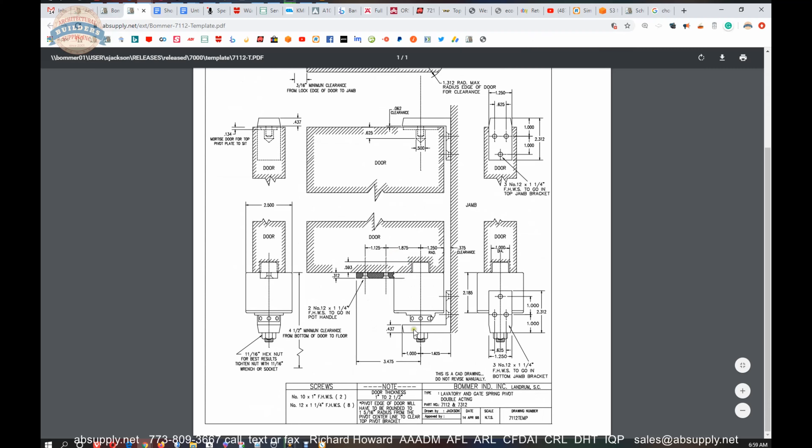Let's switch to the screen view where we can take a look at the supporting documentation for this item. So this is the item that we are looking at, the F7000 31A. Template, instructions, and product catalog. Let's take a look at these in order. Now, the template is going to refer to the entire device, the entire 7112 and a 7312. We'll take a look at what the difference is there. But here's what your installation is going to look like, right in this area.

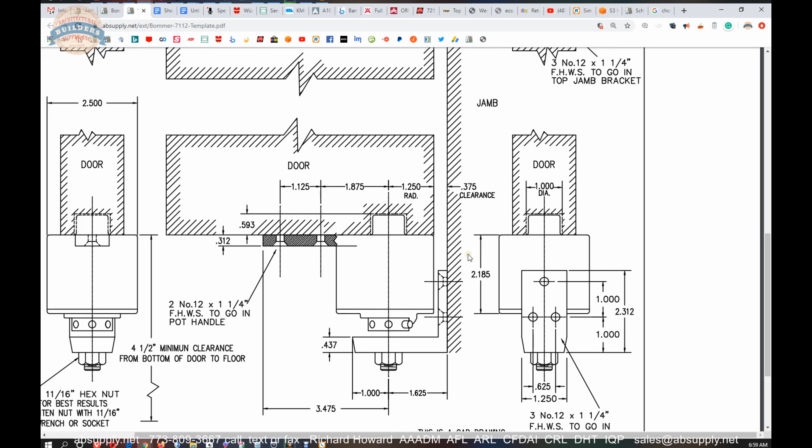So does the client need a top pivot only and they have an existing 7112? Yeah, certainly. We do sell the top pivots by themselves. There's a reason people are purchasing them. But this will show what that installation needs to look like. Okay, let's switch over to the instructions. And again, this will be instructions for the entire unit.

If you are using this in some way outside of what it was designed for, meaning the 7000 series double-acting pivot, what I would be most aware of is the jamb to the vertical axis of pivoting, that 1 5/8. So that dimension is fixed, what your jamb to the vertical axis of pivoting would be. If you're using this with something else, make sure that you'll be able to accomplish that plumb vertical axis of pivoting. These installation instructions apply to the entire unit. I won't go through them in this video.

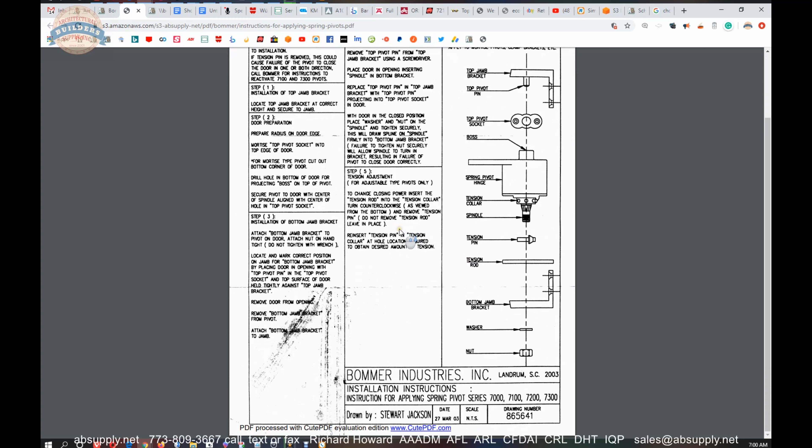Then let's switch over to the product catalog, and that's going to show you the 7000 series spring pivots. And we go right to the 7112 because that's what this has come out of. So what we have is a 7112 and a 7122. They all meet this description. Steel-based material, double acting, adjustable spring tension, etc. The top pivot is the same, but the way you go about installing them will be different based on the unit being surface mounted or mortised.

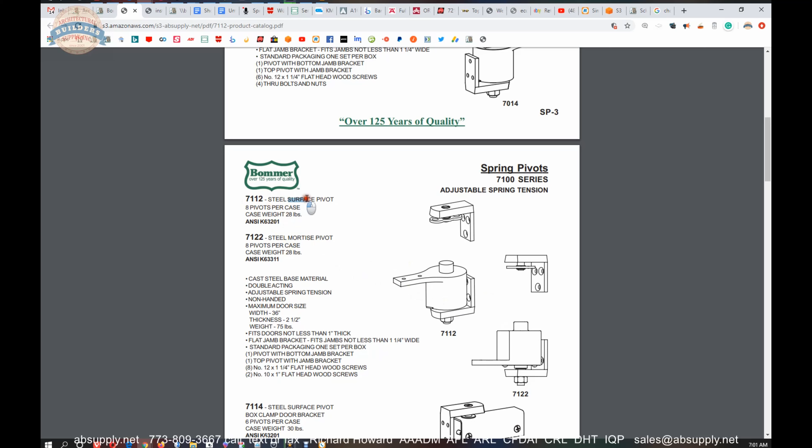And they don't mean anything about the top pivot. All they're saying is, on the bottom portion here, do you literally take your door and cut all of this out and mortise it? Or do you literally run your door to... well, what they would do is this mounting leg would be up here. Then your door would sit in this area, and you would only drill for this projecting item, which is called the boss. That's the only difference between those two.

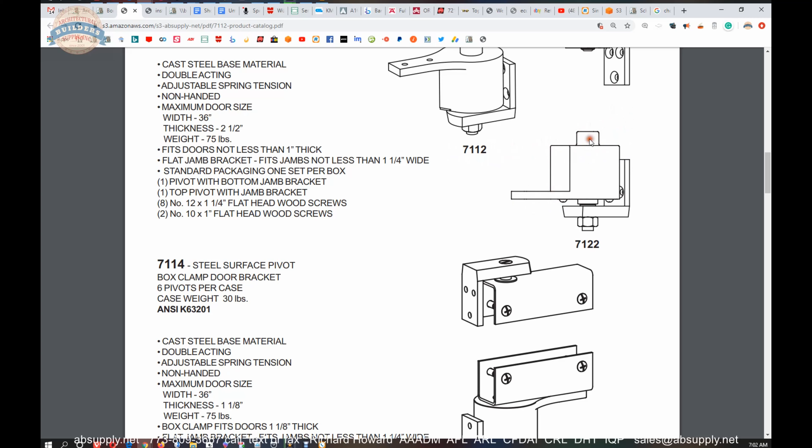And as you scroll through the rest of this 5-page product catalog, you'll see how the part number changes as certain things change. For instance, your 7112, if you wanted that as a brass-based material, you would order a 7312. Everything else is the same. Okay? Why would you want brass? Well, because you're trying to match a finish.

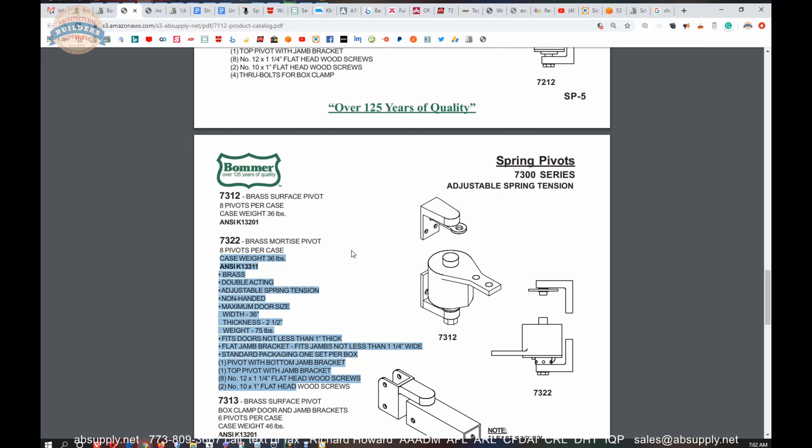There's nothing like polished brass on solid brass. Plated brass over steel is not the same. It does not look the same as solid brass with a polished finish on it. To some, it will look the same, and to some, the difference in cost won't really matter because obviously steel will be less expensive, but that would be the difference there.

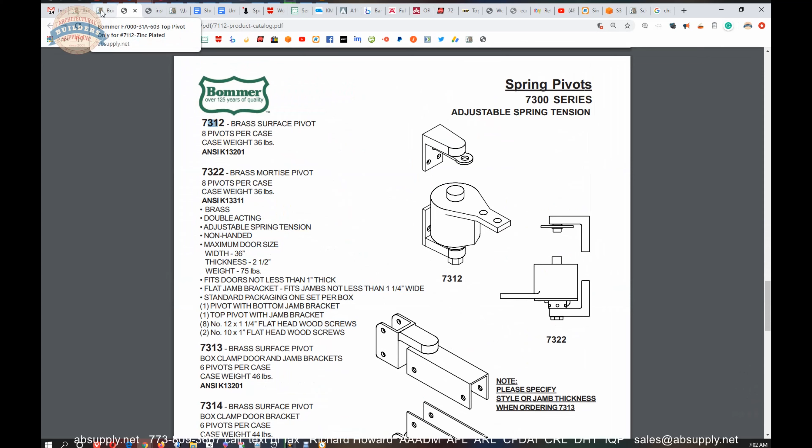We've been able to use this top pivot to salvage a particular situation. I had a client with a Dutch door, a lower leaf of a Dutch door only. This is an established client. Called up and said, I have a problem. I've got a Dutch door, and I installed 3 Bommer double-acting spring hinges on it. And Bommer, if you know their name for anything, you will for double-acting spring pivots.

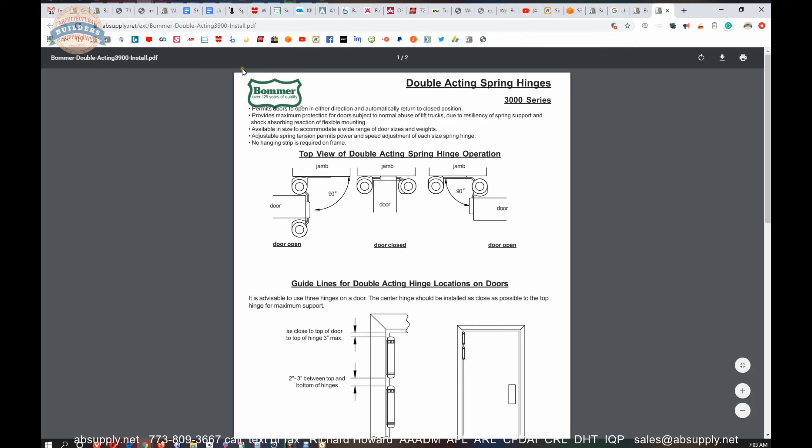But what the customer installed was the 3029 8-inch size double-acting spring pivot. That is a huge, huge hinge. That is a very large hinge. And a Dutch door, I'm thinking, well, you can see how large that hinge is. The height of the bottom panel can only be about 40 inch. It's going to be something in that range, maybe 42.

And he says the door won't swing correctly. The hinges are literally separating. This double-acting spring hinge, he says, is literally separating. And the only thing that would cause that when it was operated is because the door was too heavy. And I says, well, what's that lower leaf made out of? How heavy can it be? Well, it's about 150 pounds.

And I said, well, the hinge will handle that. You've got 3 hinges on there. Yeah, you should be okay. Well, it turns out that it was a Dutch door, but they had a granite shelf on top. So all of that 150 pounds, 2/3 of it for sure was at the top of that door.

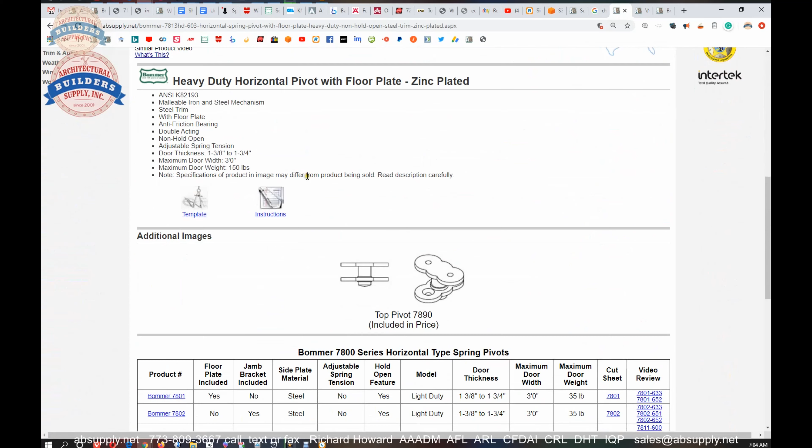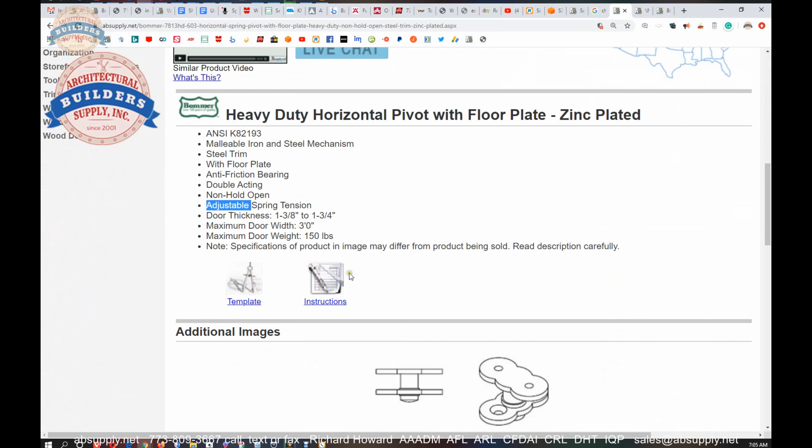So my suggestion, and it worked out flawlessly, was that the client take a Bommer 7813, a heavy-duty, rated for 150 pounds, double-acting pivot, non-hold open, adjustable spring tension, at the bottom. Now, this unit will come with the 7890 at the top. This portion here is what comes with our F7000.

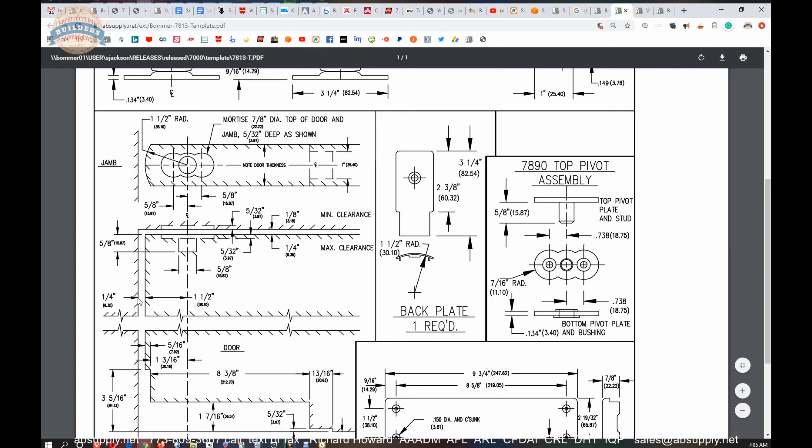So the only thing that the client had to do was to observe and get his top portion installed so that it was plumb. The template for the 7813 HD calls out 1 3/4 from the jamb to the vertical axis of pivoting, whereas our F7000 needed 1 5/8. So the client needed, I don't know what they cheated in order to accomplish that.

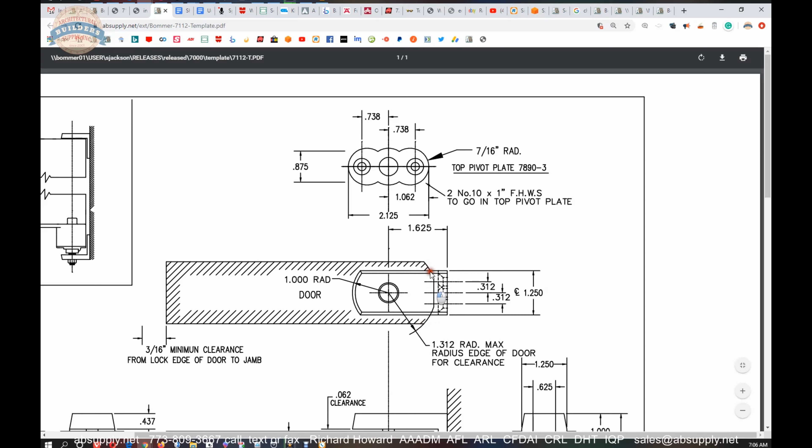I imagine what they did, and it was my suggestion, that they literally just pad this out from the jamb with something 1/8 of an inch thick. They had to, of course, radius the door on the edge to make it double acting, but that solved the problem. Why did it solve the problem? Well, because of the top pivot itself, there's no opportunity for the door to come out of the opening.

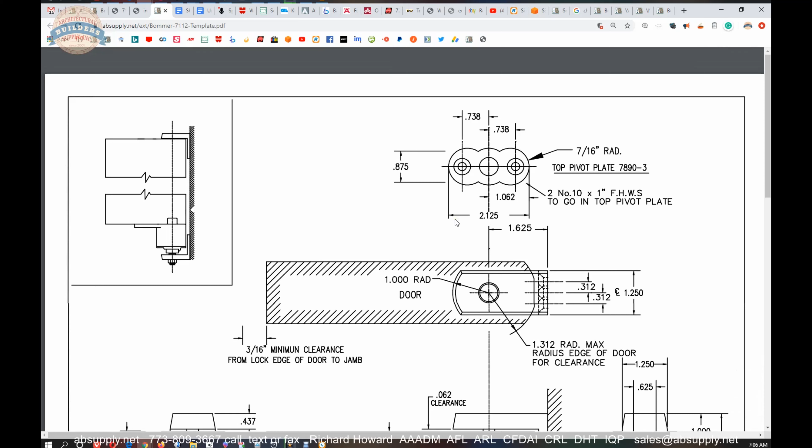Long term with the 7890 door portion, that bushing may fatigue with time. Well, we can replace those bushings, and swapping that out would be a relatively quick task. You'd have to loosen and remove the screw and the washer down here, drive the door out after removing the top pin, tipping the door out, replacing that bushing, removing the item from the door.

Maybe not even. You probably can just remove the bushing, and there you go. And that's one way that we used the top pivot only, and did so in a fashion that allowed the client to solve his problem. And we did it in a sense of, if you're familiar with model train hobbies, the term kit bashing comes into play, where you're going to build a new item using parts from other kits, so that you strip those parts out. And that's kind of what we did here.